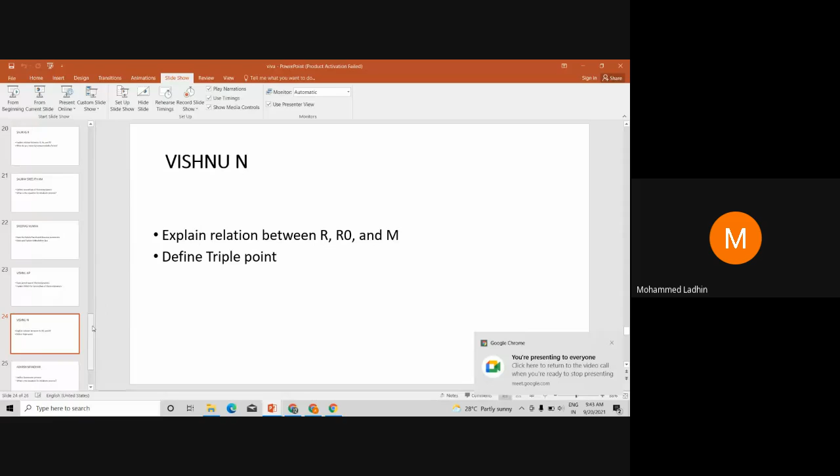Okay. Ladhin. Yes, sir. Okay.

So can you explain what is PMM2 for second law of thermodynamics? Without violating the first law, a machine can be imagined which could continuously absorb heat from a single thermal reservoir and would convert the heat completely into work. The efficiency of such a machine would be 100%. This machine is called PMM2.

And what is the relation between N and M? N equal to M1 by M. N equal to Mi by M. N equal to M by M. What is N? N equal to number of moles. M, mass of substance. Capital M, molar mass.

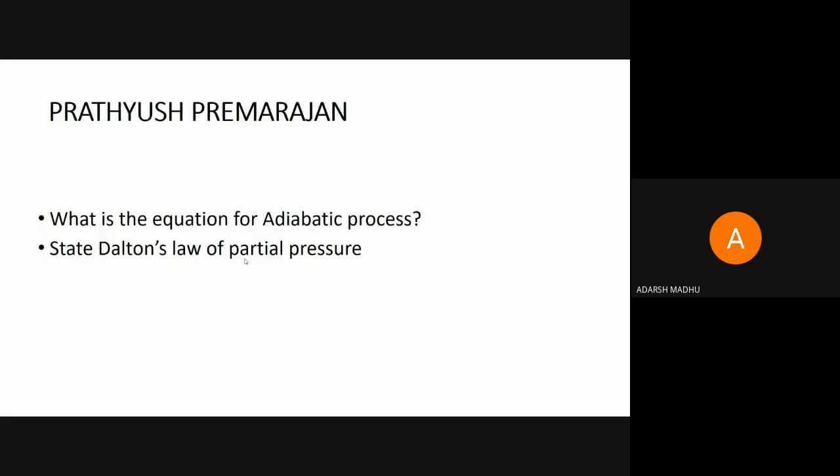Nived, what do we mean by compressibility factor? It is denoted by the value Z.

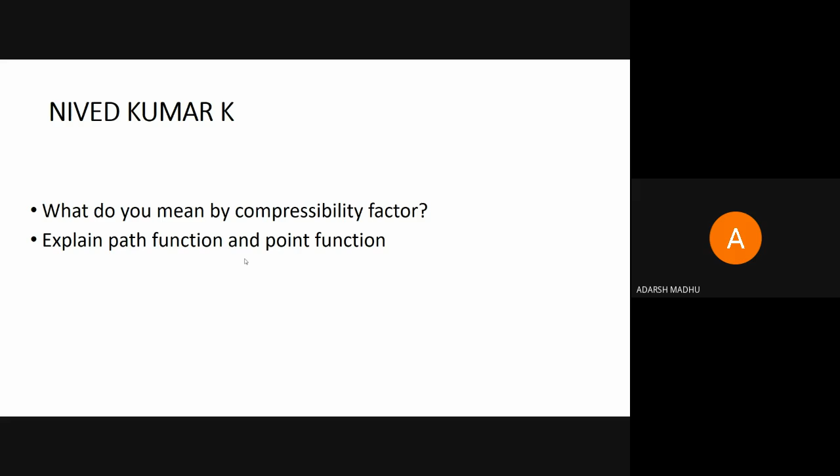Define second law of thermodynamics. Second law of thermodynamics.

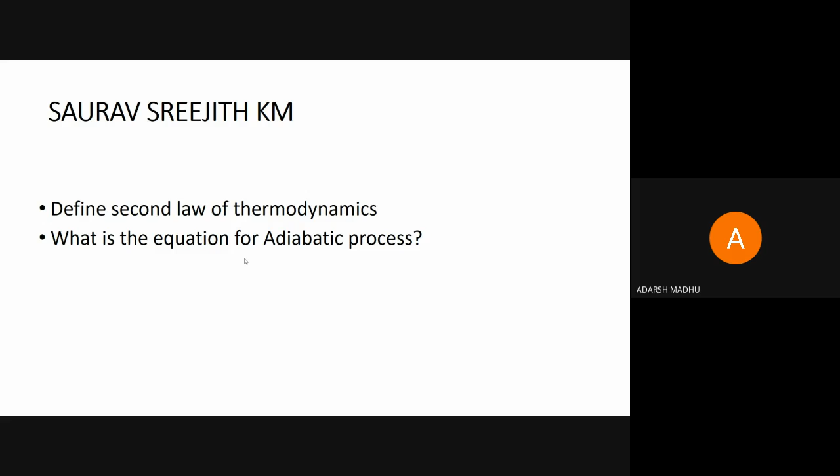Define quasi-static process. Sir, in a thermodynamic process that happens slowly enough for the system to remain in internal equilibrium.

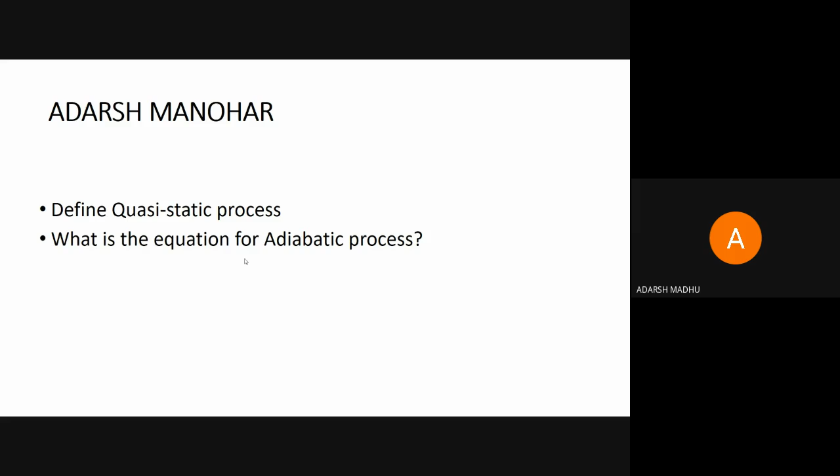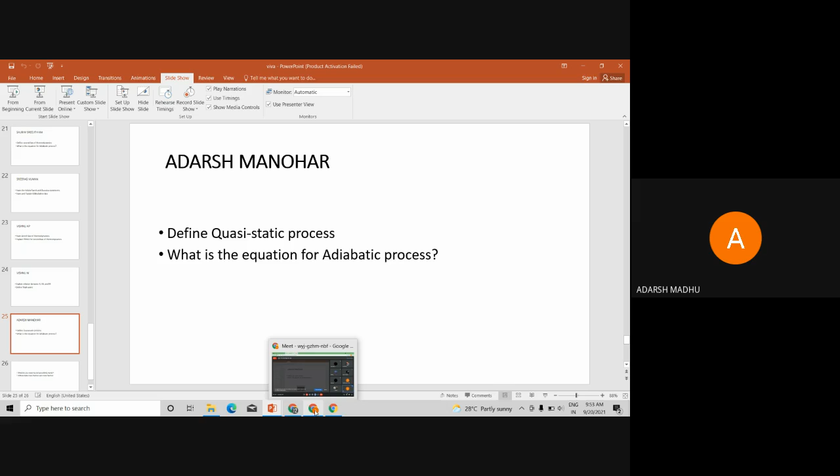So here I am explaining about the basics of thermodynamics. As I conducted viva, I fear that some of the students in our class don't have - they don't know the details of the advanced portions of thermodynamics, like second law, or PMM2, or the N equal to M by M equation, mixture of gases, something - that mixture of gases actually coming and not coming under thermodynamics.

You want to study about what is thermodynamics, basics of thermodynamics. Some students know it, a lot of people when we check know the basics. So in the first module, that is zeroth law of thermodynamics - basically the first module is simply a simple module which explains the basics, the utter basics of thermodynamics.

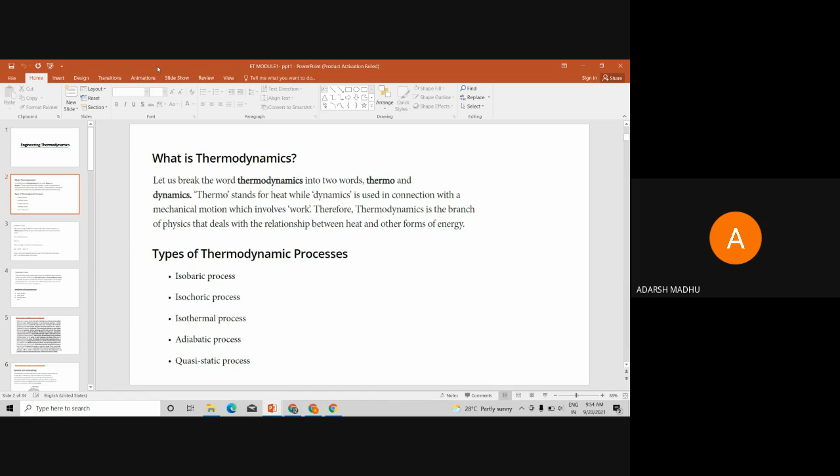അപ്പോൾ എന്താണ്, അതാണ് ശരിക്കും നിങ്ങൾ അറിഞ്ഞിരിക്കേണ്ട ഒരു മൊഡ്യൂൾ എന്ന് പറഞ്ഞിരിക്കുന്നത്. ആ മൊഡ്യൂൾ ശരിക്കും പഠിച്ചാൽ തന്നെ നിങ്ങളുടെ particular whole subject will be in the basics of the first module. So here you want to know what is thermodynamics and what is thermal equilibrium, what is thermodynamic process, what is thermodynamic state, what is isothermal, isobaric, what is adiabatic, what is the equation for adiabatic. സോ ഇതൊക്കെയാണ് നിങ്ങൾക്ക് ഏറ്റവും അറിഞ്ഞിരിക്കേണ്ട കാര്യങ്ങൾ. സോ ഫസ്റ്റ് മുതൽ കുറച്ച് ഫോക്കസ് ചെയ്ത് പഠിച്ചാൽ തന്നെ ഏറ്റവും കുറിച്ച് കയറാം.

So here I am again revising the first module once again for you, for the students who didn't get the basics of our whole subject. So what is thermodynamics? The name itself indicates thermo plus dynamics. Thermo is something refers to heat, and dynamics is something refers to the motion, mechanical motion.

So together comes the word thermodynamics, which means a movement of heat from a particular point to another, or the movement or processing of heat. Heat is transferring or receiving or moving from one state to another. So the whole term thermodynamics relates to movement of heat or motion of heat, or mechanical, electrical, or chemical movement of heat.

So what are the types of thermodynamic processes? Isobaric, isochoric, isothermal, adiabatic, quasi-static process. So iso means same or constant. The name itself indicates it is constant. So isobaric, baric means pressure. Isobaric process means constant pressure process.

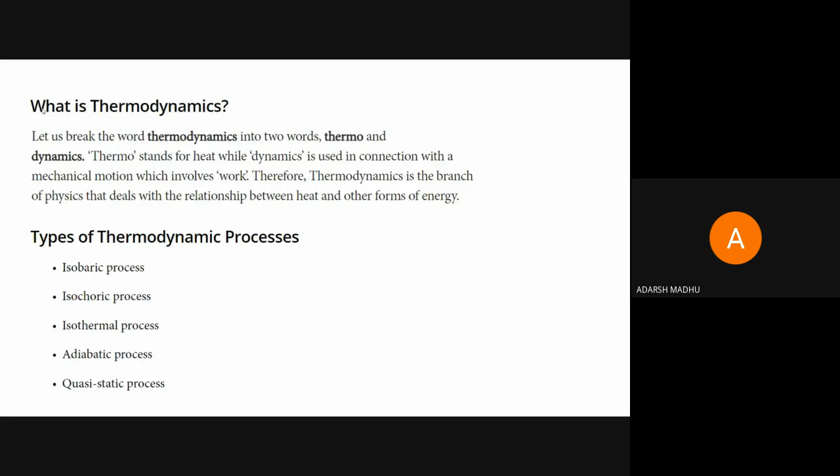എന്താണ് അതിൻ്റെ റഫ് ഐഡിയ ഉണ്ടാക്കി വെക്കുക. What is adiabatic process? Q equal to 0. Q equal to 0 മാത്രം ഓർമ്മിച്ചാൽ മതി. PV raised to gamma equal to constant is the equation form.

As I said, PV equal to nRT. P equal to pressure, V equal to volume, n equal to number of moles, R is a specific gas constant. The majority of our students in class don't know what is R value, what is R naught value, what is M value. What is R? Simply R is defined as specific gas constant or characteristic gas constant, R. And R naught equal to universal gas constant. R is specific gas constant, R naught equal to universal gas constant.

R naught is a very constant value, 8.314 kilojoule per kilomole Kelvin. If you are removing kilo, it becomes 8314.

If it is nitrogen, there is another value. If it is oxygen, it has another value. If it is silicon, argon, it is another value - R value, specific gas constant value. A particular standard value R for air is 0.287, or 287, kilojoule per kilogram is the standard specific gas constant value for R.

That R എവിടെയാണ് വരുന്നത്? PV equal to nRT. So ideal gas condition, PV equal to nRT. N വരുമ്പോഴാണ് R വരുന്നത്, nRT. എപ്പോഴാണ് R നോട്ട് വരുന്നത്?

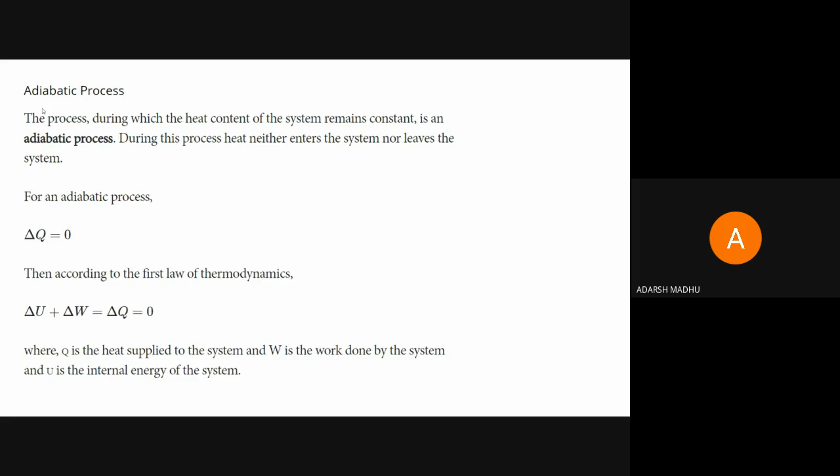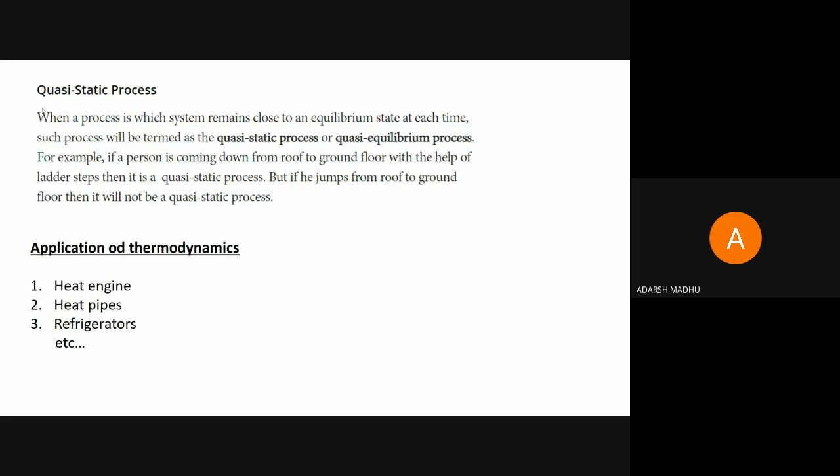Then quasi-static process. Then application of thermodynamics. The main application in the first module we are studying is heat engine, heat pump, refrigerator, etc. Coefficient of performance, efficiency, like that. And what is macroscopic and microscopic viewpoints in thermodynamics? How we can relate macroscopic and microscopic? A question on microscopic and macroscopic viewpoints.

Micro means very small, macro is something large compared to micro. Macroscopic viewpoint means we are considering the whole system as a single thing. Microscopic approach means we are considering even a single thing. In our class, S4 mechanical, when I am describing the mark of each and every student, Agash KM, Agilam, Anirudh, Amit, I am considering microscopic approach.

And when I am saying that overall average of the class is 32 out of 50, not fixing on each one, I am taking macroscopic approach. That is the main difference. Thinking at molecular level is called microscopic approach. When considering the total average for describing a system, it is macroscopic approach. Then what is system and surroundings?

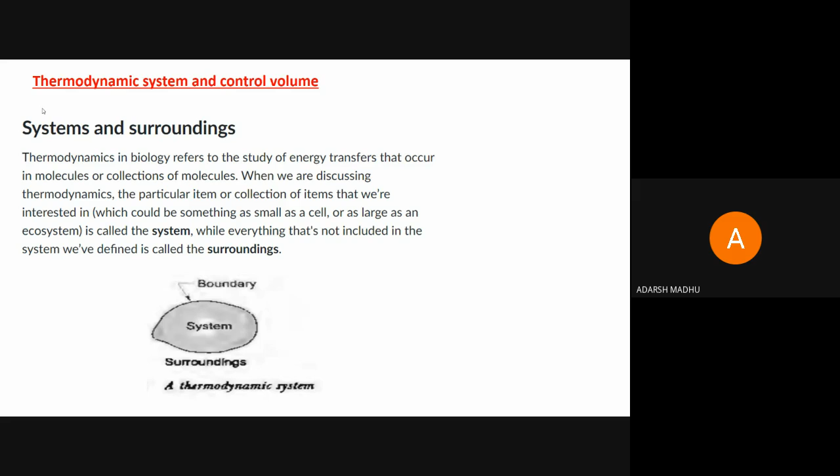What are the types of thermodynamic systems? There are mainly three types: first one is open system, second one is closed system, third one is isolated system. What is open system, closed system and isolated system?

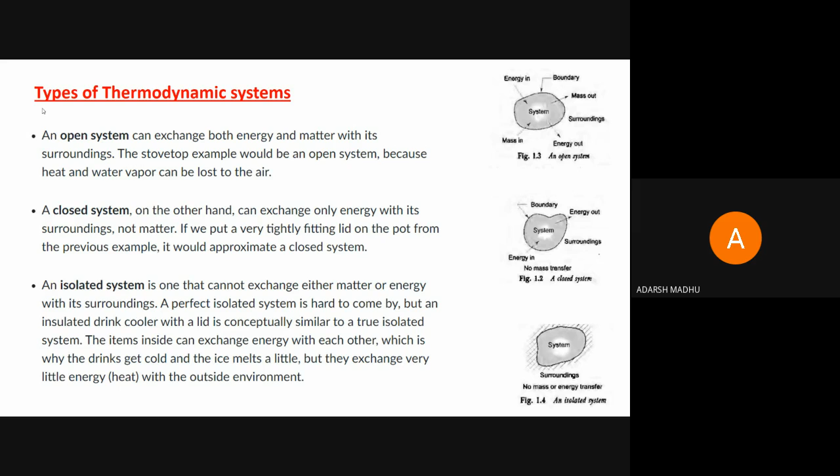Okay, and what is control volume? Control volume is a particular type of section in a system which we can say is a volume. For its analysis, we are considering a particular system or matter or a particular setup inside a system, where there is an outside line for the system. We can take a compressor, and what is inside it we can say is a control volume.

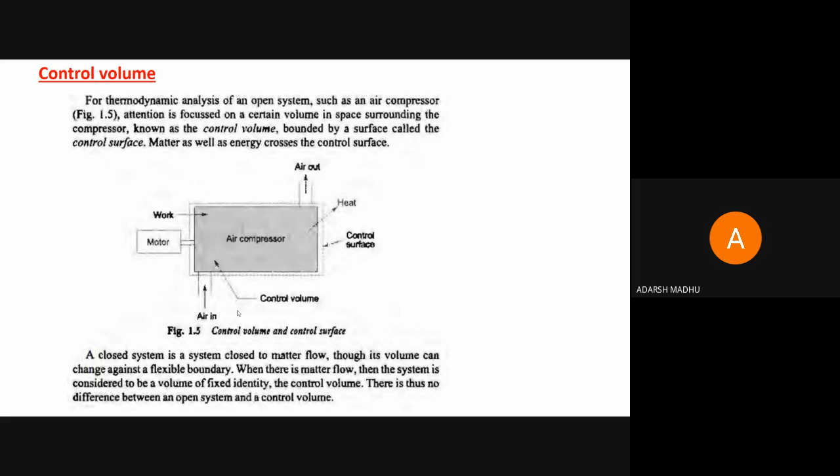It is a boundary line, and a particular type of section inside it that we are considering for analysis can be treated as a control volume. Okay, and microscopic.

Then what are the properties? As I asked in the viva, what are the properties of a system? Intensive properties and extensive properties are the main two types of properties in a system. First one is intensive property. It does not depend upon the mass, like temperature and pressure. What are extensive properties? Those which depend upon the mass are called extensive properties.

What is state? What is process? State is a condition of a system at any instant of time. When a system is moving from position 1 to 2, like when a process is moving, and we take a point 1.2 or 1.5, at any point, the process has a particular pressure and temperature.

Initially there is a pressure and temperature, and finally there is a pressure and temperature. And at any point in the middle of the process, there is a particular pressure and temperature, and that condition is a state. 1.2 is a particular state; it possesses a particular temperature and pressure. 1.8 is a particular state. We can describe a particular state by its conditions, that is pressure, temperature, volume, anything.

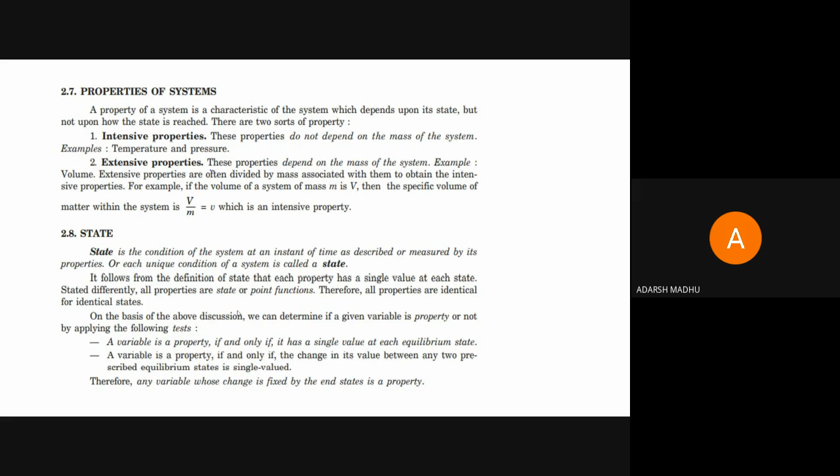Okay. A process is when the system undergoes a change in state from one position to another. A state means a particular pressure and temperature, like 10 bar pressure and 250 degrees Celsius temperature. At state 2, this pressure increases to 20 bar and temperature lowers to 200 degrees Celsius. We can say that from the first state to the second, the pressure increases and the temperature decreases.

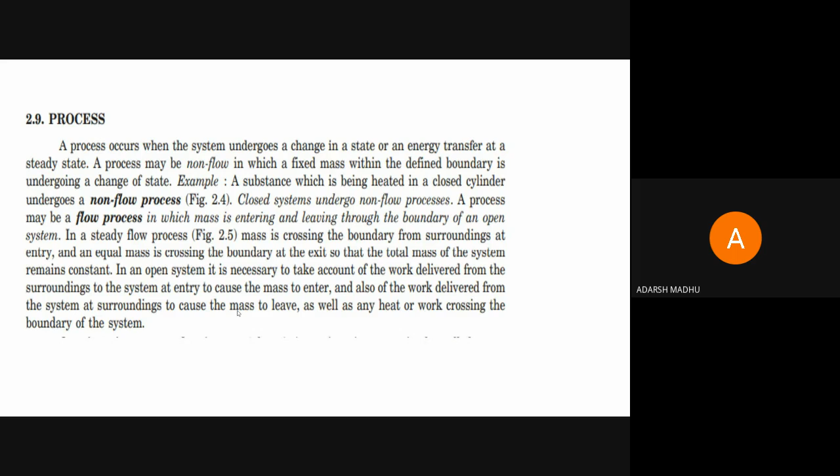When a system undergoes a change in state from one point to another point, we can say it is a process. There are two types of process. First one is a flow process and second one is a non-flow process. A closed system undergoes a non-flow process, where the matter is not flowing anywhere. And an open system we can say undergoes a flow process, where matter is flowing inward and outward. Two types of process, non-flow process and flow process.

Cycle, thermodynamic cycle. These are all the basics of our thermodynamics. For studying the second, third, fourth and fifth modules, you need to be thorough with the first module initially. Cycle.

What is a cycle? When a process undergoes a change of state from 1 to 2, 2 to 3, 3 to 4, anything, and at last it reaches 1 again, we can say it is a thermodynamic cycle. A thermodynamic cycle means a series of processes where the initial point and final point are the same.

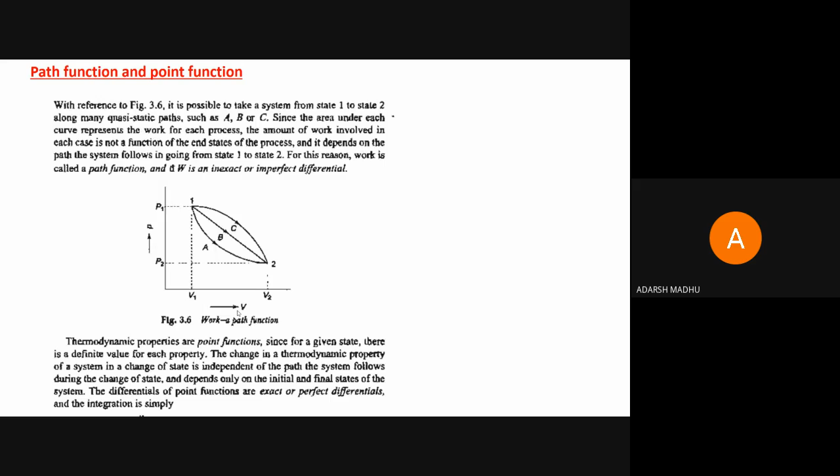Okay, a point we can represent in a graph; with P and V we can represent it in a graph. We can say it is a point function. Point function. We can denote this point 2, and the volume too. So something that can be shown like that is a point function.

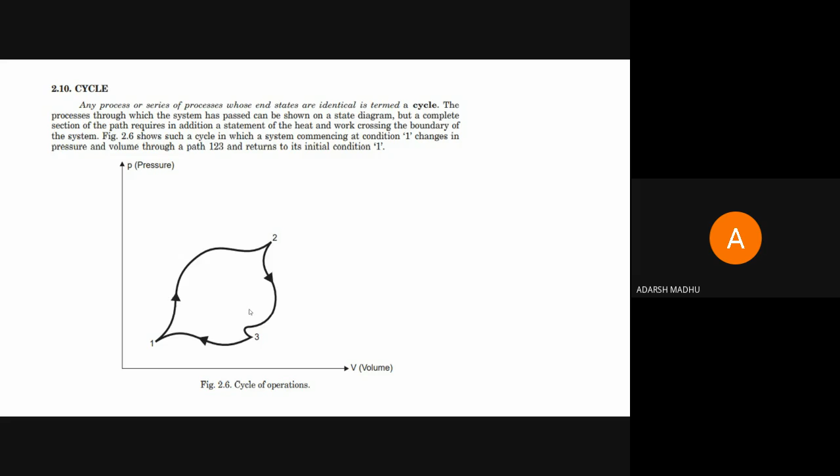Path function is the function which depends upon the path. It moves according to the path. We can say it is a path function. A function which depends upon the path it follows is called path function, and the function which depends upon the initial starting point and final point is called point function. Right? Path function and point function.

Then phase. Phase means 3 types of phase. We are studying 3 phases in our total thermodynamic process: solid, liquid, and gas. Mainly 3 phases. What is phase change? Liquid to gas, gas to solid, solid to anything. Phase change. Okay. Then homogeneous system and heterogeneous system.

What is homogeneous and what is heterogeneous? Homogeneous system means a system consists of a single phase. That is only gas, only liquid, or only solid. Or we can say a mixture of the two. That is, when two constituents like H2 plus O are mixing together, we can say it is a homogeneous system itself. H2O is a homogeneous system.

But what is heterogeneous system? More than one phase is included in the system is heterogeneous. That is, H2 plus O means it is a heterogeneous system. But H2O is a homogeneous system. When the two phases are placed in a system separately, we can say it is a heterogeneous system. When the two phases are included but mixed together, we can say it is a homogeneous system itself.

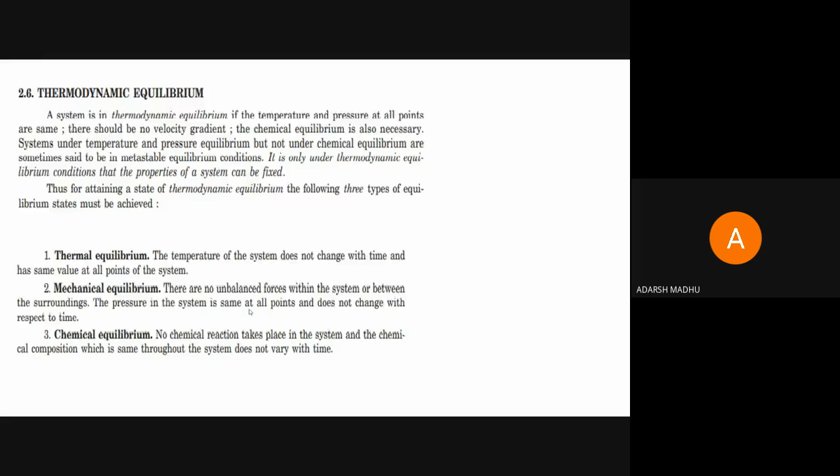Okay. Then what is the main point of our first module? The zeroth law of thermodynamics. When a body A is in thermodynamic equilibrium with B, and again in equilibrium with C, then B and C are in thermodynamic equilibrium with each other. It is the basis for temperature measurement. The first module deals with the initial basic theories and temperature measurements, thermocouples or thermometers, etc. That is the zeroth law of thermodynamics.